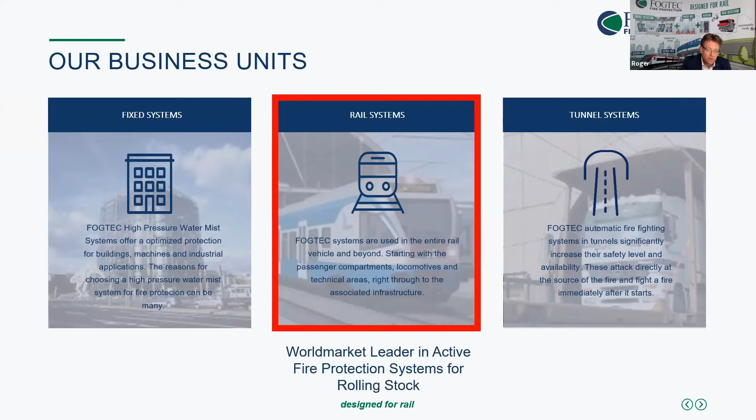The 3 main business units FOGTEC is working in are the so-called fixed systems, which are covering industrial applications as well as building applications. The tunnel systems, which take care of underground facilities, underground infrastructure. And the part we are also speaking about today, the rail systems department, which is taking care of all the rolling stock, the track guided vehicles, where, as I already said, FOGTEC is world market leader in active fire protection systems for rolling stock.

What does it mean when FOGTEC is working in this field? The rail systems team is a system provider for active fire protection systems in rolling stock applications, meaning it's not working on transferring building or aircraft business solutions to the railway. It's developed on the spot for rolling stock applications.

It's a system integrator with a full verification program, with a wide product portfolio on different levels of technology and safety. And it's a full-time rolling stock team, which delivered more than 17,500 systems to the market. And if I speak about systems, I mean systems covering a whole train and not counting each car. So it's really covering trains and locomotives in this way.

And the big difference to other fire protection companies especially is that this team is really taking care 24/7 of trains, locomotives, track guided vehicles, and not one day a hotel, one day an archive, and one day a train.

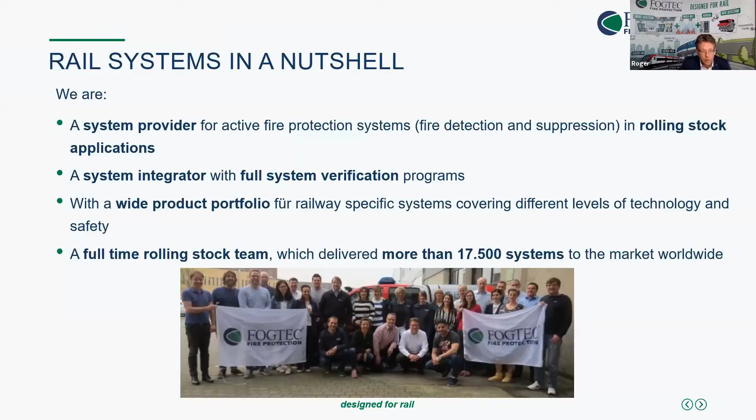The technology FOGTEC is using is more and more based on own developments related to the railway industry, especially optimized for this field of application, having fire detection solutions on different technical levels, depending on the requirements from the customer, water mist, gas extinguishing and aerosol extinguishing systems, and on the detection side, working with smoke, temperature, linear heat detectors, aspiration systems, the whole field of different kinds of products.

Where we are coming from, and this is what the name is related to, FOGTEC is showing the water mist technology. And FOGTEC started in 1997, its first applications in different kinds of fields, mainly building, but we also supplied the first fire protection system for trains to the Indian Railway in 1997, in the year we were founded.

Water mist technology means at the end to split water in very, very small droplets to create a big reaction surface. And the reaction surface you can create, for example, from 1 liter of water is giving also an impression, a parameter, of how efficiently and how fast heat and energy could be transferred. Meaning the bigger the surface is, the faster energy can be transferred.

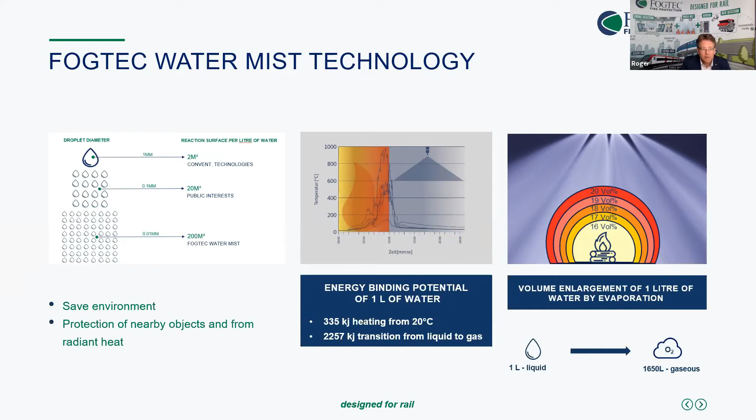At the end, directly at the flames, where we have the change of water droplets to water steam, there's also an effect to substitute the oxygen from this place by the water steam. From 1 liter of water in liquid phase, you could create 1,650 liters of water steam, which means also a displacement of the oxygen, but only directly at the flames where the big energy can be transferred. And in the rest of the room, the oxygen concentration is on the level you need for human protection.

So how does it look like then in a train, such technology? You see here a cross-section of the high-speed train, which is a graphic with our system and components around, to give an idea how the system should work. You have smoke detectors in the ceiling. How these smoke detectors are placed, or in which way it's validated where to place them, you will see later.

They are connected with the central unit, which is, as you can see here from the components, not a classical fire protection central. It's really a computer unit designed for rolling stock applications. If a fire starts, the fire is detected by the so-called two-detector dependency, and we developed an algorithm called dynamic two-detector dependency to avoid any unwanted activations on the train.

So a specific environment has to be created that the system accepts as an alarm, to avoid any influence on the system and its operation by smokers or more simple events. Because as you know from the railway, as early as possible the fire should be detected here, to avoid any interruption of operation.

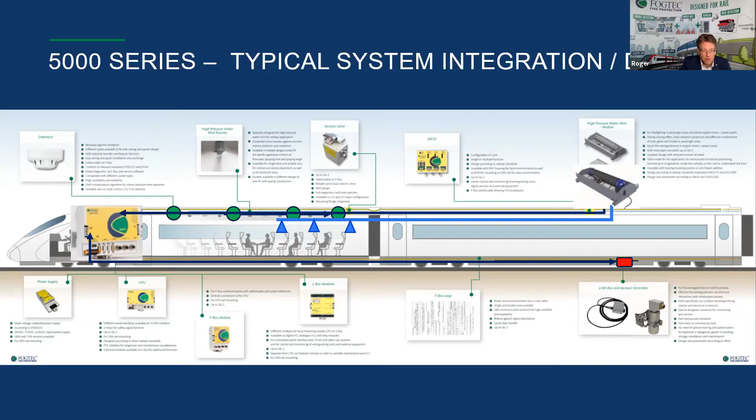In the underfloor area and the technical areas, in this example, aerosol generators are used, where a fire is detected by linear heat detectors inside, communicating with the CPU, the central unit, and then activating the aerosol generator unit to extinguish the fire.

And just to give an example of how it looks in reality to have a water mist system integrated: first, we have a passenger coach, a metro car in Germany, where a water mist system is integrated. And what you could see here is how two nozzles were activated within this passenger area. And we see this great energy transfer, which I explained before.

It's possible to reduce the amount of water needed for the fire protection, here to 2 liters per minute per nozzle. That means in total on this metro train we are carrying 60 liters of water to protect the train, with 10 minutes spraying time and 3 to 4 nozzles activated, depending on the zone where the fire is detected.

What you also could see is how the room was filling quite fast with a fine water mist. You still can see, to be evacuated in the right way, and the fire will be covered, securing the area. And this is also a point which is very important for the approval process: that the people on board can stay in the surroundings of the fire, at a distance of 2 meters, without any danger or any problem to their health.

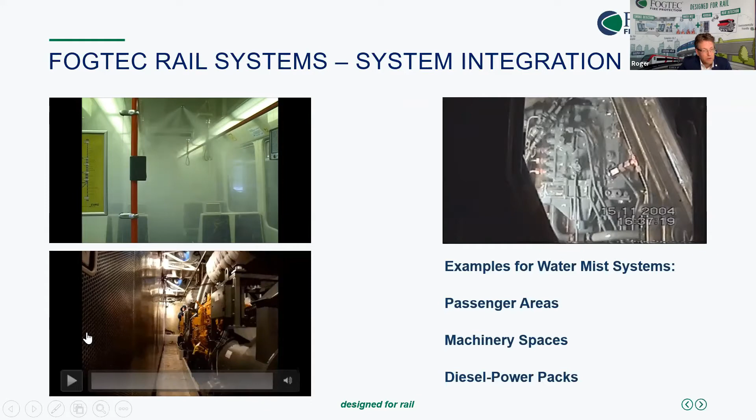And you will see with the next video, which in this case is taken from the type test we did on the Israel State Railway generator wagons with Bombardier a few years ago, that the design of the water mist is also very much dependent on the application.

In the passenger area, there will be a risk like vandalism, a burning bag, a burning newspaper, but in general a quite slow fire development, while in the machinery spaces we have oil, diesel, and maybe other stuff which burns quite fast with high temperatures. So a very fast increasing heat release. For this reason, the density of water mist is a completely different one.

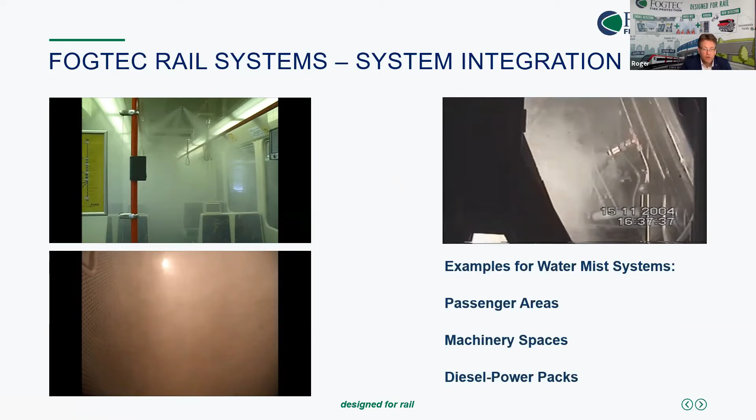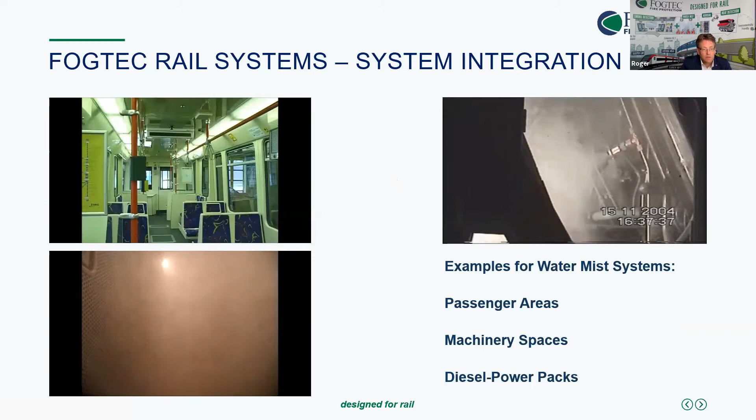To give another example, in a diesel multiple unit, this is a video, as you can see, from 2004 already. So it shows also a little bit how long we've been doing this business. This was during driving at 120 kilometers per hour, where we put a glass into the maintenance access and made this movie during driving to show how this area is filled, even if the wind is coming in from the front side. This is just to give an idea how this would look.

Then what I think is very important, to be always up to date, is the activity in associations, normative groups, and standard committees. So this is an overview of the associations and organizations FOGTEC is active in. The railway industry, as I already mentioned, European-wise, German-based, but also the International Monorail Association. Additionally, we have the CEN committees, the standardization committees on European level, American level, and Italian especially. Why Italy? You will see later on.

And then there are also big research projects like Sovereign and SOLIT. Sovereign is taking care of new energy carriers, risks from battery and hydrogen, while SOLIT is related to tunnel protection.

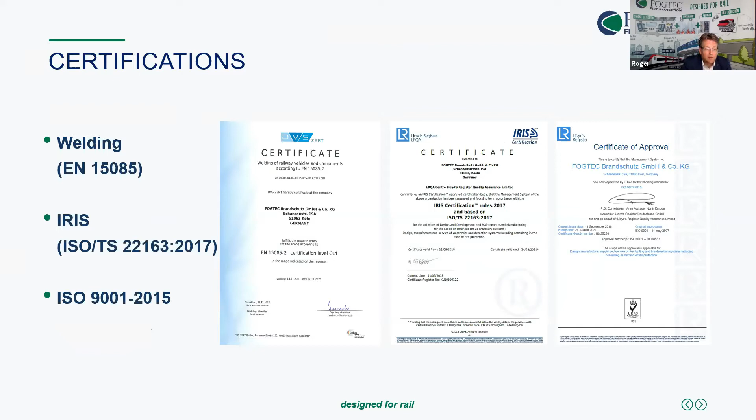Of course, there's a lot of paperwork, and paperwork will be also a topic later on. But paperwork also on certifications. FOGTEC is a certified welding company for components on rolling stock, is IRIS certified since 2009 and also ISO certified already since 2001.

Some of our OEM customers we are supplying to: our biggest customers last year were Stadler, Bombardier, and Siemens as the 3 big ones. But we also see that the Eastern companies like Hitachi and CRRC are coming more and more and taking also a big role for FOGTEC actually.

Some references I will just jump over on high-speed trains and intercity cars, special urban traffic references like monorails, light rail trams, light rail vehicles, metro cars, locomotives and special equipment trains for maintenance, and also cog railways. FOGTEC protected the steepest, the longest, as well as the highest based cog railway in the world.

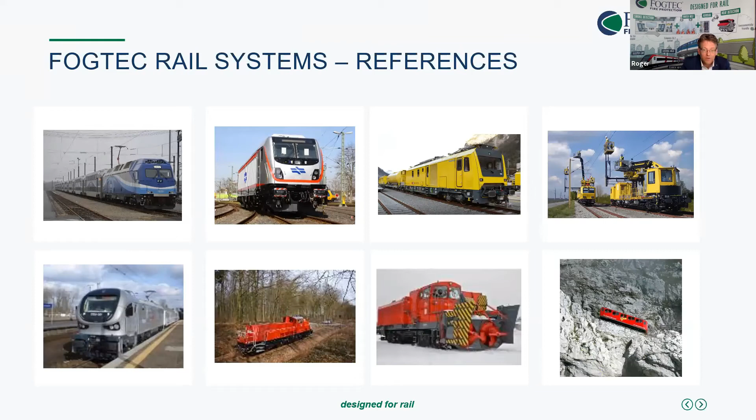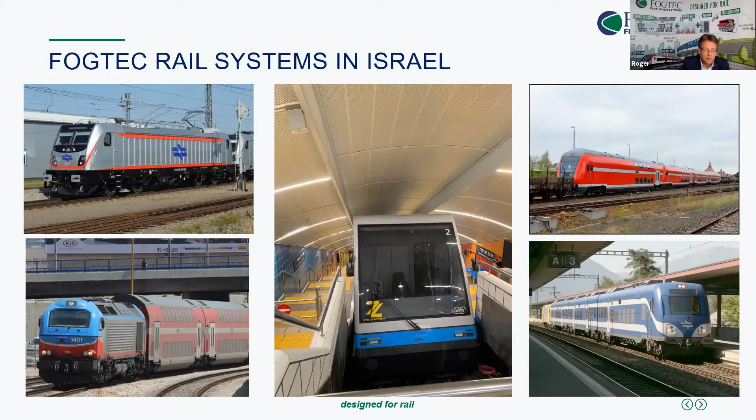But what is happening around? There are the standards we have in the background, and you will get just a short question to give your feedback, because when we talk about fire protection standards, I would say mainly two main standards are dominating the world more and more: the EN 45545 and the NFPA 130. So if I'm right, you have always up to 20 seconds to answer some questions in between, which will also come later on for some other slides. And then later on, we will see how the results are.

So I was expecting in this way for the Israel region that NFPA maybe is more dominating than the EN 45545. But that means also that one point of my presentation, a few slides later, will be very important for both of you. So we will see this further.

First of all, having a short look at EN 45545. The working group taking care of it is working group 01 from TC, Technical Committee 256. I would like to give a very brief overview about the status of part 2, the revision work which is running right now, and then some special topics related to the ISO as well as to TSI.

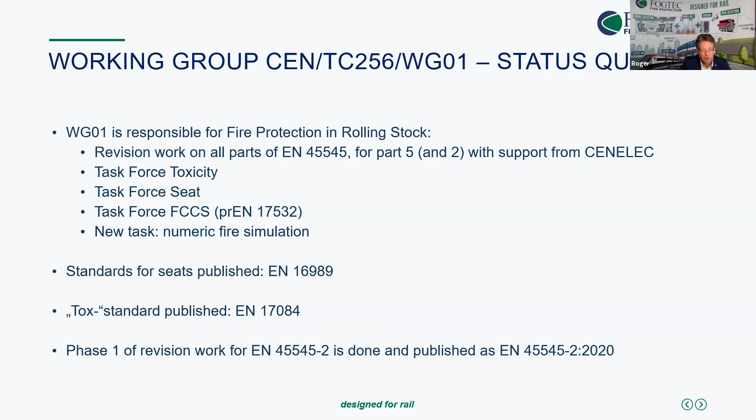There are 3 task forces working, one for toxicity, one for seats, and one for FCCS, which means fire containment and control system, where a new number is already released, actually as a pre-EN 17532. And a new task is coming up for numeric fire simulations, where CEN has the idea also to give more standards to that. For the seats, the standard is already published, 16989. The toxicity standard is also published under the number 17084. And for EN 45545 part 2, phase 1 of the work is already done and already published as EN 45545-2:2020.

But how to work with that? Because the TSI, the technical specification for interoperability, is not a topic for Israel, I have to agree. But in Europe, it's creating trouble now because this TSI is referring to the older standard. And this brings some strange situations to the European markets, in that non-TSI vehicles, meaning vehicles not running on a TSI European network, can already use the new one or the old one, they can choose, while for the European network, which is referring to TSI, they still have to use the old one.

So at the end, actually, people have to discuss and clarify the applicability with the contractual partners and the approval body, the authority. And so actually we speak about a transition period as long as the older version can still be used. But this is a really big topic, that the TSI standards are not automatically referring to the latest version of a standard.

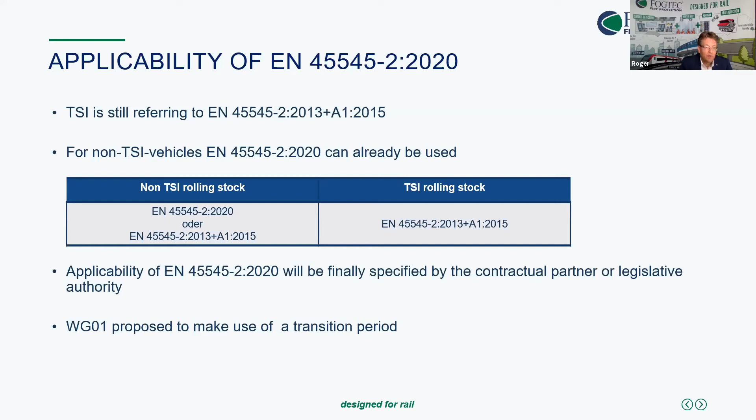The revision work on the EN is normally checked every 5 years. So 5 years after release, there's a survey to check if there is a need for revision work, meaning validation against experience and further needs. And if there is a view from people that a revision should be done, then there should be consensus among all to get it started.

And this is already done for all parts of the actual version, meaning all 7 parts are under review and will be reviewed in the coming time, where I would expect something like 3 to 4 years from now for the final result in a completely new 45545. Actually, they are working on part 3 and 4. These are the two which are right now under review.

And for part 2, released in 2020, there's already an amendment in progress because there were still some failures in the references as well as in the foreword. So if you look to the latest standard of part 2, you have to refer to 2020 and the amendment.

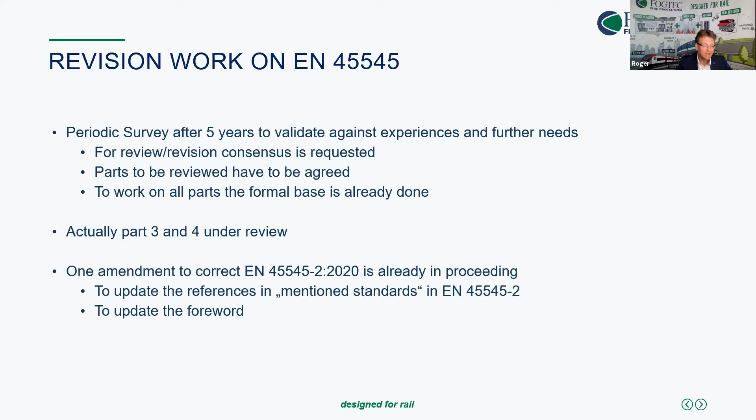The one big topic is then, and this is exactly the situation we could also see from the first question of the survey, that we are jumping around the world as a supplier, as a partner, as a planner, as a company, and we have to change standards from country to country or region to region. So there was a proposal now from Working Group 01 to the ISO committee to set up the fire protection standards in a worldwide standard, an ISO standard, and this should be based on the EN 45545.

This brought a lot of intensive and interesting discussions, but in the end, from all sides, very positive feedback. And so now the next steps are the application for the work items and to set up the working group at ISO. So I would expect that somewhere in the future, there would be one joint standard to cover fire protection in rolling stock and railway. But as you know, standardization work takes a long time. And so we will see when we can reach a final result on that.

And this is a very important topic, what you were giving here as a result, because this would also be feedback I would like to give to the ISO committee next week when we also have our meeting with the CEN committee. So the opinion of the people using the standards or having to make use of the standards is very important, I think, and this I will transfer to the committees.

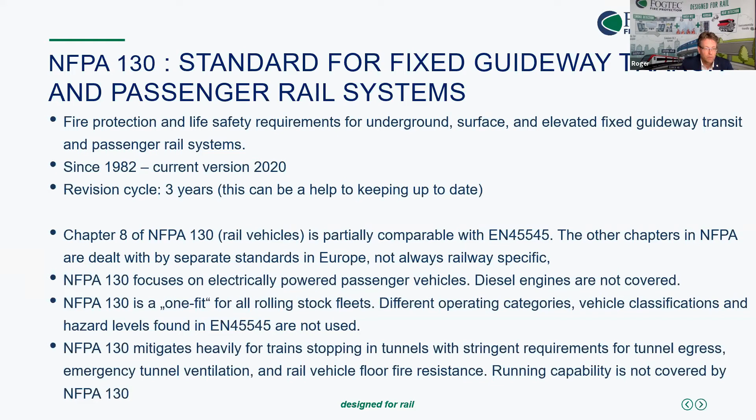It does not mean that I agree to all topics mentioned in it, but in general, the overall approach I fully agree to much more. And a little bit compared to EN 45545, we put here the different parts in relation.

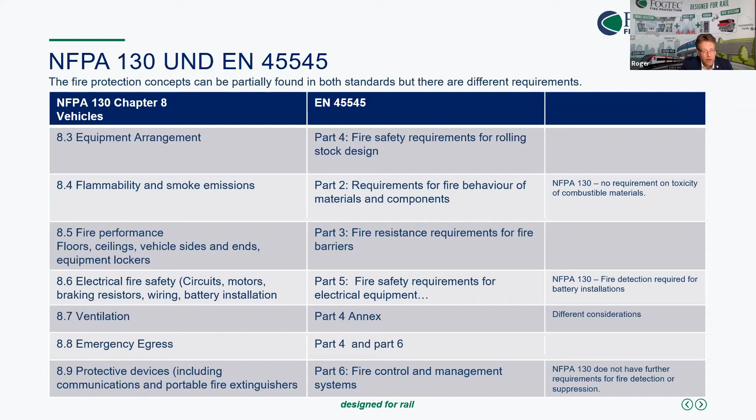So you can see that later on also. I will not go too deeply in that. But two main topics I would like to bring up about the actual discussions of NFPA 130, about the active fire protection. In the past, and even today, the NFPA 130 is not really taking care about active fire protection. And starting with 2014, there was for the first time an annex called Annex G involved, where compensation measures were given by using an automatic fire suppression system, mainly in the passenger area, to protect the people.

And where it was described that this can limit fire growth, and that this could also influence the design of stations, the design of ventilation systems, and so impacting the infrastructure in a positive way, if you see it from the volume to invest, and so to make it more efficient also cost-wise.

During the last discussions, another topic came up. Maybe you know that in the US, most cars are closed to each other, especially in the metro area. So maximum two married pair cars are used. And now in New York, I think for the first time a real open gangway philosophy is followed. And it's more like a test trial on 10 trains out of the big order they placed with Kawasaki.

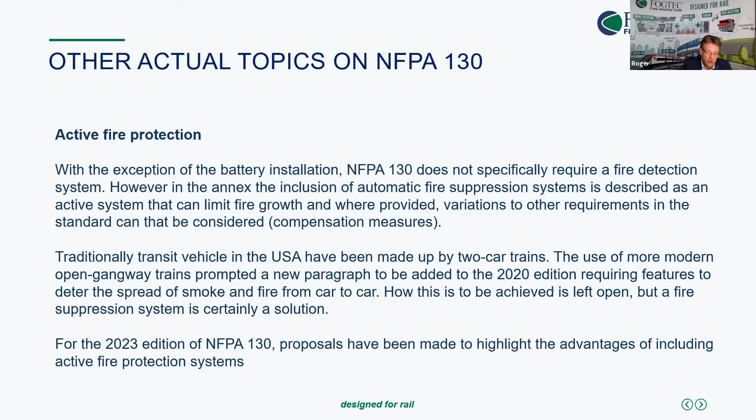And so now it's a big discussion how to avoid any spreading of smoke and fire from car to car. And of course, also for this, a fire suppression system could be a solution. And this is under discussion. And for the 2023 edition of NFPA 130, there for sure will be a bigger part on one side for firefighting, fire detection generally, but also for the open gangways, the open gangway philosophy.

A big challenge actually is the component listing concept, because you have these components which we also tested in different ways between NFPA and EN 45545. There will be also development for the next revision. And for this, of course, a joint ISO standard could be a very, very good solution to make this more efficient. But at the end, it means also everybody has to agree to the standard. And this makes it quite complicated to find a joint solution.

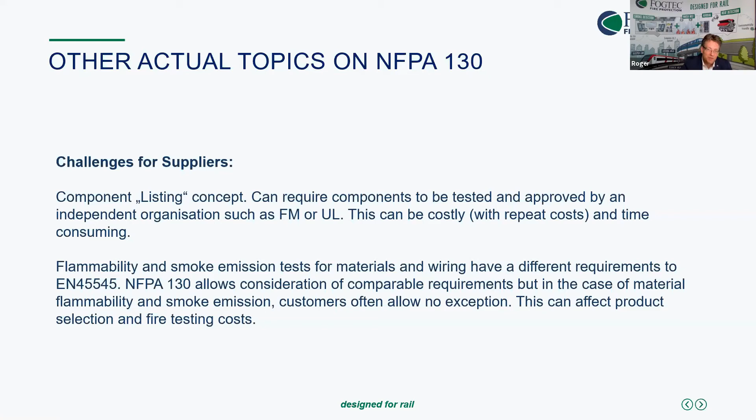There are two other standards I would like to mention quickly. In Italy, after the big tunnel fires, there came out a law that all trains which run through a tunnel longer than 1 kilometer have to be protected. Means all trains have to be equipped in the passenger area with a water mist system. And this is legally requested in Italy. I found it quite strange. Of course, for our business it was a very good development, but I think Italy is still the only country worldwide requesting that.

But this was a reaction to the big tunnel fires and a lot of dead people, which the Italians had to claim after, I think it was 1999 to 2001, where we had a row of several tunnel fires. And so this law, this Decreto Ministeriale, came up where this is requested. And the UNI, the Italian Standardization Committee, had to develop a standard in accordance to that, how to implement it in a train and how to test such systems.

So it could be seen in different ways. On the one side, it's an optimum to protect passengers. On the other side, it's questionable if it's really necessary to always have all systems on board and to protect with all potentials. And I see from the answers, I'm with you that it should be project-specific decisions, but in Italy, it's still clearly claimed by law to have such trains protected.

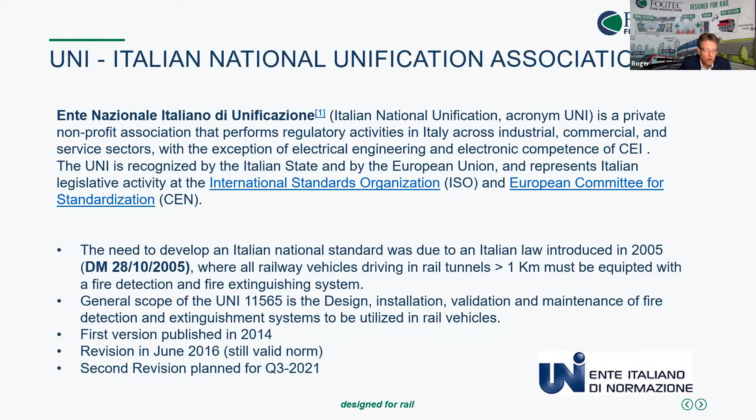The first version was published in 2014. The actual standard is valid from 2016, and in Q3 of 2021, the next revision is planned. So the guys are just working on that. Also, our Italian colleague of FOGTEC is working within this working group. This is not so important at the moment. This is a bit of comparison to the other norms, but you will see this later on if you go through, and you can also contact us any time if you want more information about the way of proceeding.

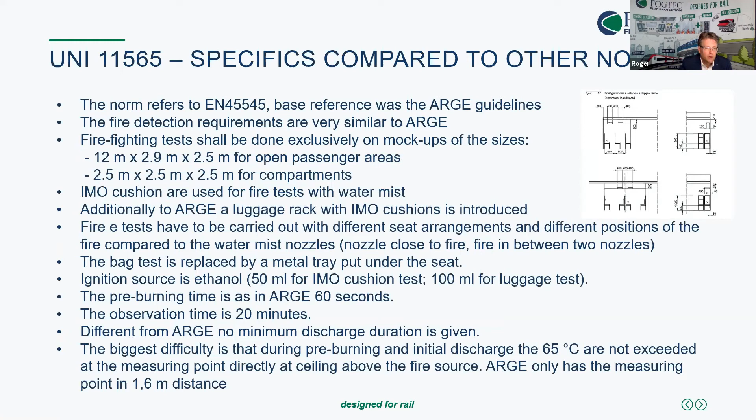I just want to jump to the ARGE guideline. This is a standard first published in 2007. The working group on that started in 2002, organized by the 3 TÜV organizations in Germany. And the point was that there are standards requesting a fire detection and firefighting system, but nowhere was described how to validate and verify them, and how to check if the systems are working right.

And so these 3 parts came up: part 1, fire detection, part 2, firefighting, part 3 for system functionality, and also some safety topics. And actually version 5 from 2018 is valid. Here we have a 2 to 3 year revision cycle to keep it always up to date, with all the things learned every year from checking, verifying, and testing.

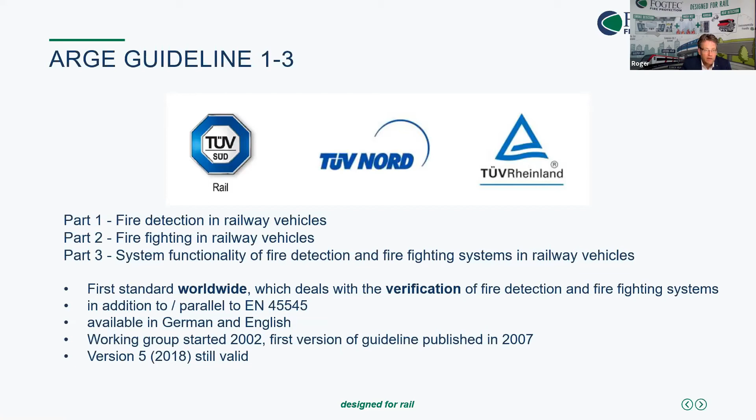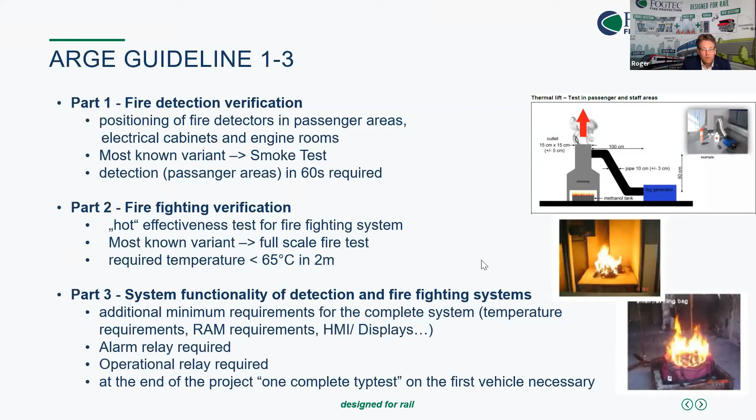As I said, we have 3 parts, and it's also described in a good way how to test them with the smoke generator, and how to make the fire test, how to have standardized fire tests to check the effectiveness of such systems and the performance.

And if we speak about topics like that, of course we also have to speak about safety. Safety here, I mean functional safety. And within our company, we set up a few years ago a specific team only taking care about that.

So if we speak about safety, which comes mostly with the customer's requirements first, but their requirement should come from a risk analysis. And what we detected also, to be very honest, is that it is preferred maybe to be safe, to be sure, not to make mistakes.

So people request a higher safety class than they really need. From the risk analysis point of view, to monitor what is the risk on site, the risk of the operation, how to evacuate people, we could see in a lot of cases that people unnecessarily increase the safety level, which could be rated between 0 and 4.

So in this way, it's always our recommendation to really check what you need, and then define the safety levels which are requested.

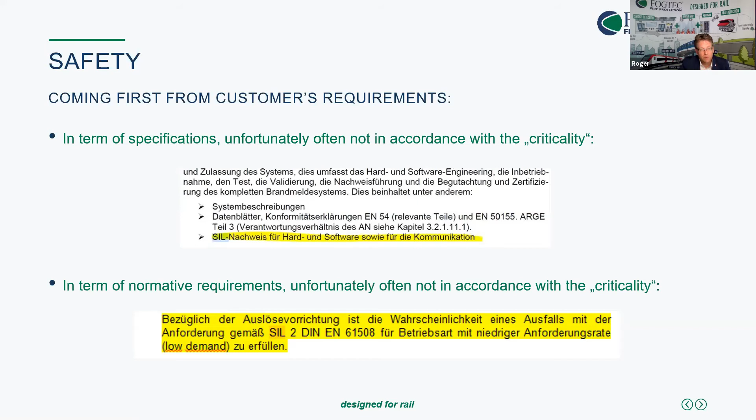Still people want to increase the number to be sure, which creates a lot of efforts and costs that are not necessary. So from this way, it's really a topic where we have to educate people much more, in a lot of cases.

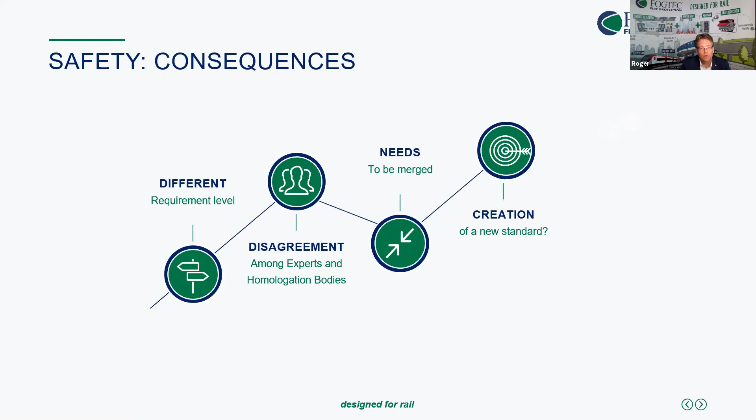And for this reason, in a project you always have the situation at the beginning where the requirement level comes from the analysis, then you have a discussion with the experts, and then it goes forth and back a little bit to find at the end a solution, what is the right way to proceed.

And FOGTEC has a specific approach, as I said. We set up a team for that now 5 years ago, which is taking care about safety and SIL requirements in a very detailed way.

Our approach is to have a fully certified SIL2 hardware and software solution available for the market for the customers, because there is no half SIL, there is no half safety—there's safety or non-safety.

And for this reason, it's really important also to understand that systems which should be SIL certified have to be SIL certified with all the requirements around.

What you can see here is that we started for the current series of our products in 2012, what is today called the BI level version, meaning basic integrity level version. And this starts from the lowest requirement level of safety.

And then we increase the system, the single components, further and further to the higher levels until a fully certified SIL2 system, both on the hardware components as well as on the software base. This is a modular solution, highly flexible, with full redundancy in communication.

This is really important for me to mention, because a lot of people speak outside about SIL and safety, but if we speak about safety, it's really important for all the components to be approved against EN 50155, EN 50126 and 8.

The software assessment has to be done in regard to EN 50657, and the complete system assessment—this is at the end what brings you the SIL and safety certification—is the EN 50129.

And we see a lot of people running around talking about SIL and safety and providing part solutions with some smaller things, maybe a safe relay or something like that. And this is not the way safety has to be understood.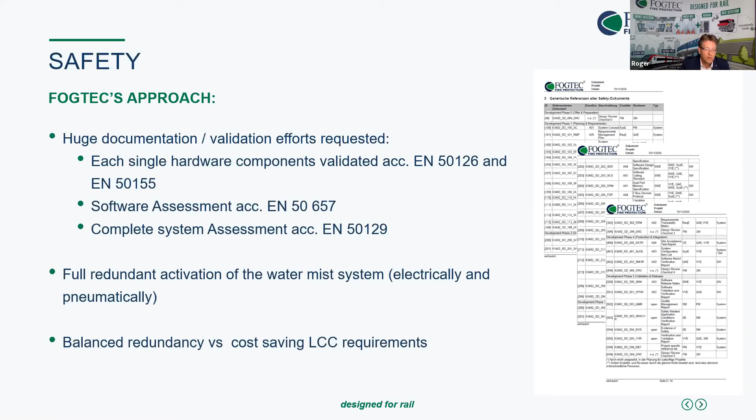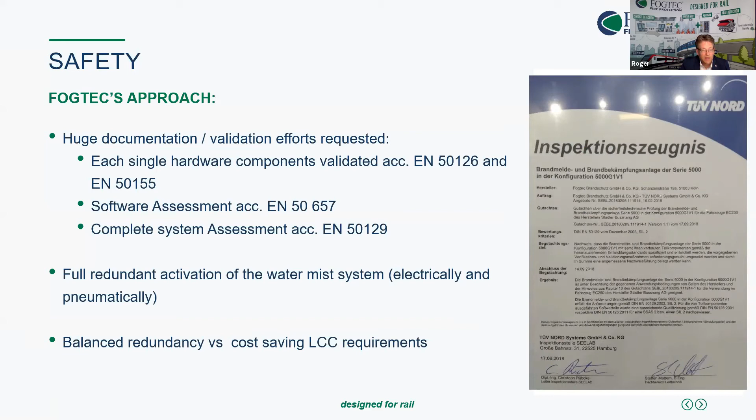Safety also means we already mentioned EN 50657, which is the software standard right now for how to program and handle software. This has a huge influence on the organization of the company, its structure, and how development processes have to run.

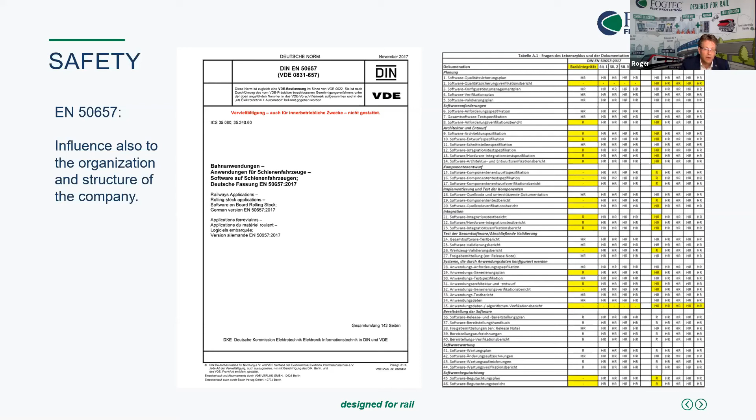On the right, you see a table of documents which have to be created for software development only to demonstrate that you did it the right way and checked every step of how it was proceeded. So at the end, a lot of paperwork again.

For this reason, we have to ask ourselves: does more paperwork really help make systems safer? Please, in any project, ask yourself seriously what do you need. It's not necessary to increase safety standards only to feel better. There should be a specific reason from the risk analysis behind why you need a safer system. But if you decide for it, please do it the right way and not with partial solutions.

Doing it the right way, smart concepts is a very good example, because with this solution we could demonstrate with operators together how to optimize and create an underground infrastructure and mobility system much more efficient.

The basic situation with this case study was that we had an older metro car in the city of Essen in Germany, and they had a lot of problems because the approval body requested them to rework all underground stations as they had an issue with the evacuation concepts. This meant they had to demonstrate how the underground station is affected if a train is burning at the platform, standing at the platform.

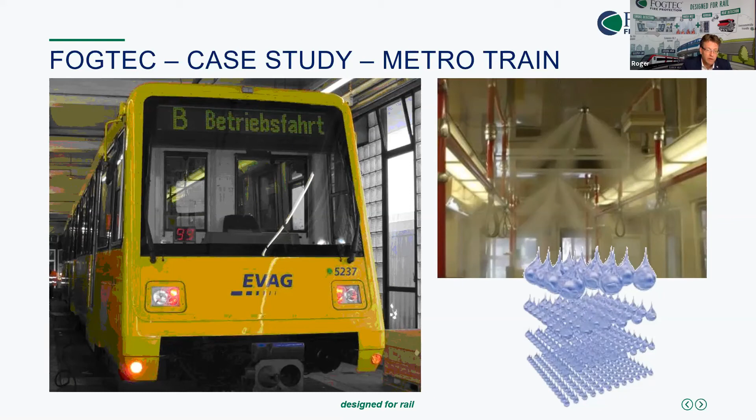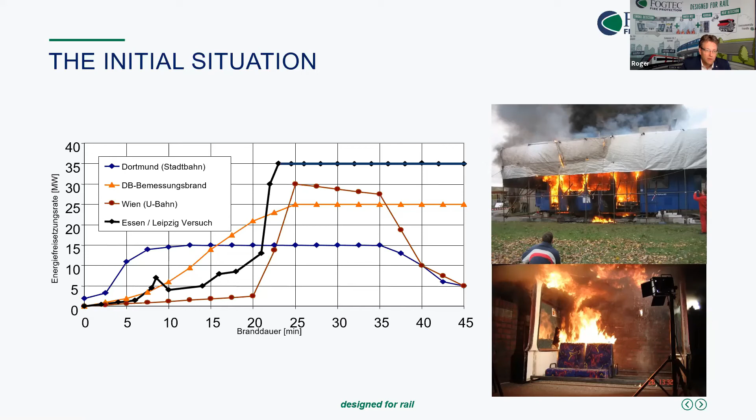Then they created out of that the black curve here, the Essen-Leipzig Versuch, as it's mentioned, where we had a development up to 35 megawatts for the train, which of course could not be handled by the old stations they had.

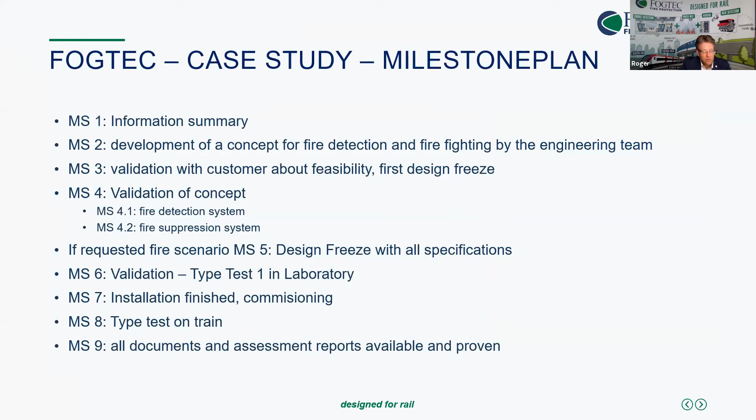Then, in connection with that, we did a milestone plan for how to optimize the fire scenario. With the different milestones, which we also agreed with the approval body, we started to validate different solutions for this kind of train, implementing a fire detection system and doing smoke tests on board to validate a solution for how such a train could be protected.

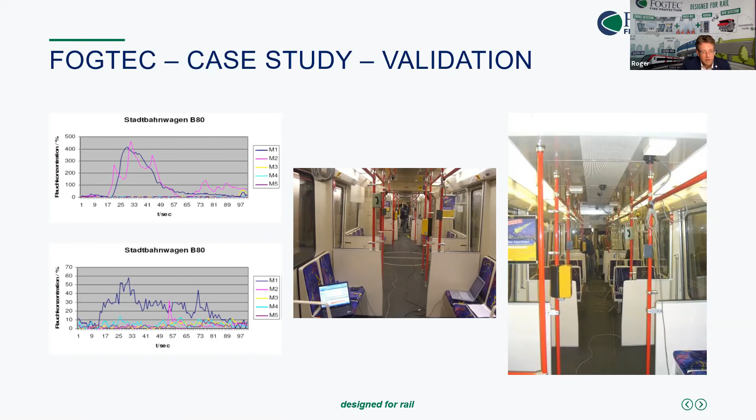Afterwards, a full-scale fire test with original material was done, with four different test scenarios using a water mist system, and then one hot test as a verification and comparison to the activating test.

I made a big mistake during this test, to be honest. We were monitoring the fire test and took a lot of pictures, but we should have made a picture or movie of the customer's face when we did the hot test and he saw how well his material was burning.

This material was approved against DIN 5510 from older times. But after some years of use, with people sitting on it and cleaning materials applied to the seats, it doesn't behave the same as at the beginning. You could create quite a nice fire on that.

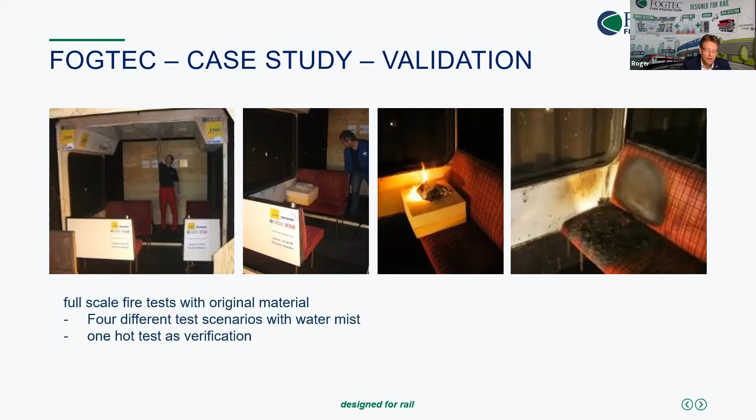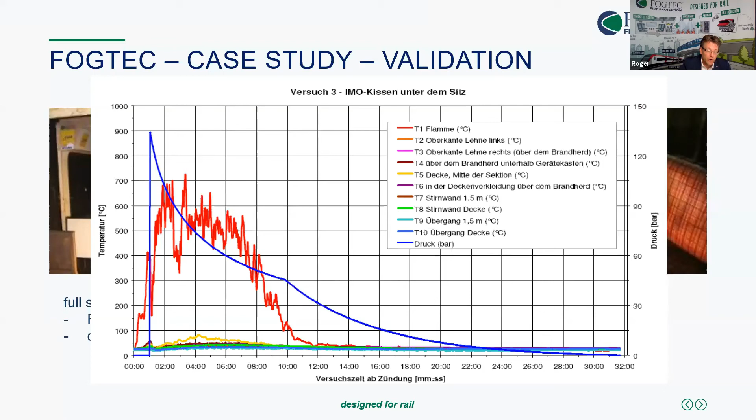With the fire protection system on board, we could demonstrate that the fire curve was suppressed immediately. On this curve, the x-axis is time and the y-axis is temperature. Besides the direct flame temperature, shown by the red line, temperatures are not increasing much, only a few centimeters above the ignition source. The yellow line came up a little, but the fire was suppressed. The flames fought against the water mist, but the fire did not spread and was controlled very well.

Based on that, the system was designed and integrated into the train, where you can see here. We also did further calculations on the car body for how to integrate the cylinders and systems. In the end, a 60-liter water cylinder had to be integrated into the train, along with smoke detectors in the ceiling, nozzles, pipe work, and everything around it.

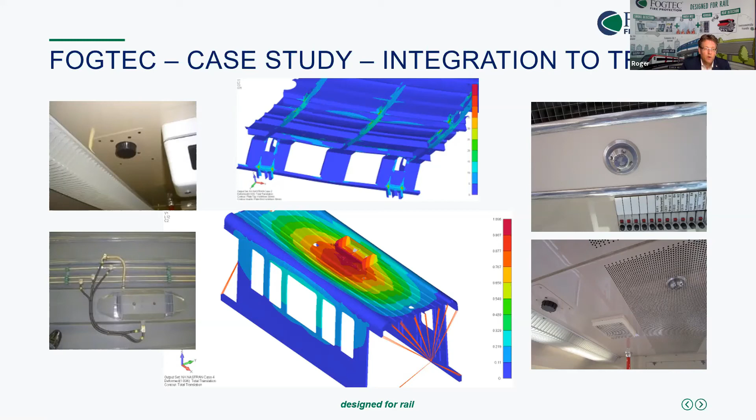Then the final step was the type test with the approval body. You see on the right pictures from the type test activating while people are standing inside.

On the left side, you will see me explaining to the experts how it works. You can see I was much younger during this time, and hair was a lot longer back then—unlike now, when all the hair cutters are actually closed in Germany.

But most importantly, looking at the fire safety scenario curve again, there was a new line now, the green one. That's the one which the approval body agreed the operator can use if a FOGTEC system is on board. So from the black line they had at the beginning in Essen, they could change to the green one when using a FOGTEC system in the trains.

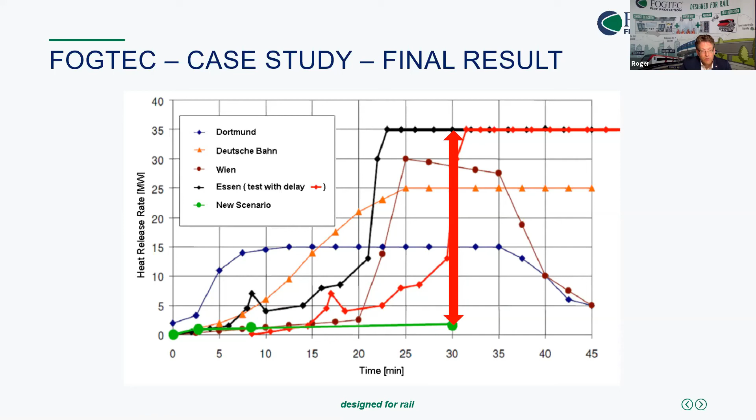Depending on the equipment of the train, they could also raise two different scenarios for the modernization work and investment in the underground stations. Comparing the black and green lines, there was a difference in the investment for the stations, including equipping the train, of 89% for the green line. This is where I'd say the smarter way of firefighting also creates a very commercially interesting case for each operator.

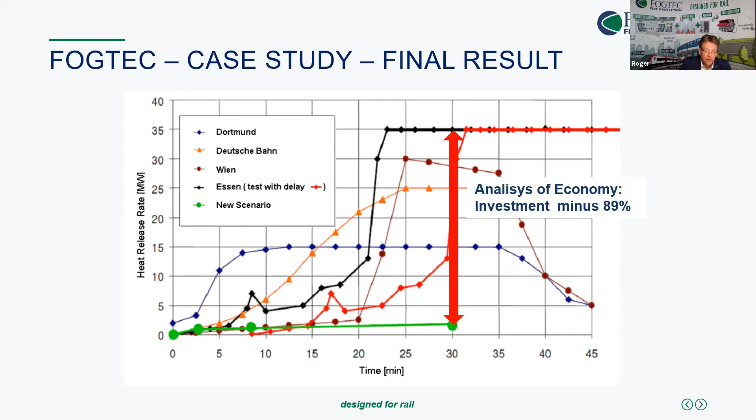So there's a very close relationship now, because we became something like a hero for them, as we could help them create this scenario and realize such a lower amount of investment needed to upgrade the stations.

Last point of my presentation: I'd like to jump to new energy carriers, which bring new challenges to fire protection topics. As we've said, more and more regions and countries want to become greener. But along the life cycle of batteries and hydrogen solutions, it's quite unclear—there's still a big gap in knowledge for fire protection.

We have a very high density of energy bound in a very small volume, and getting this under control is a big topic for all of us in society together.

For this reason, there's one research project I'd like to recommend to everyone involved in new energy carrier topics. It's about the safety of urban underground structures due to the use of new energy carriers.

This means figuring out how to handle a parking house or tunnel if a car is burning there, and you may not even know if it's a battery-driven car—meaning the fire is very local—or a fuel car where the fuel may run out and spread on the floor, or a hydrogen car where the hydrogen is under the ceiling and starts to burn. All these cases and scenarios are not finally resolved.

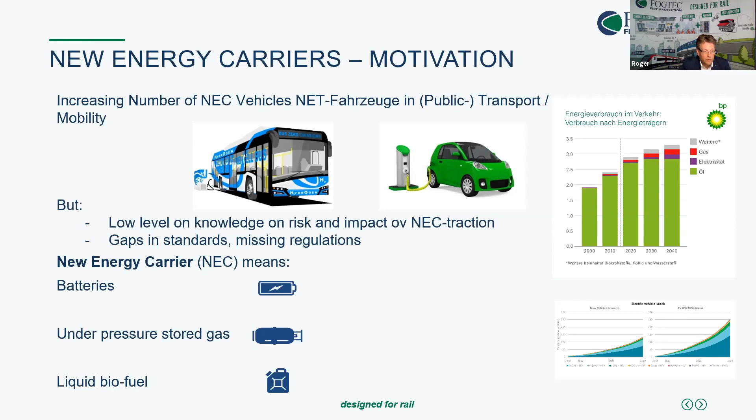Do not get me wrong, I don't want to make you afraid about these technologies. It's just from my point of view that they have to be handled right, and that we have to know about the risks and how to manage them. But to create this knowledge, how to handle them, from the new risks and the missing knowledge, we have to combine it in a research.

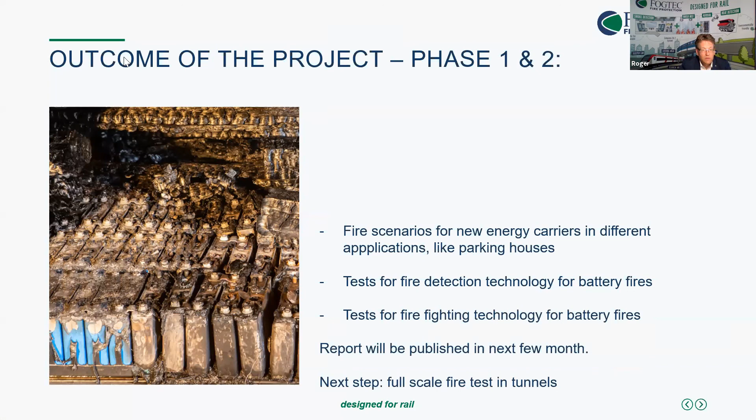And also from the fire tests here, we could see as a result that for the fire scenarios for new energy carriers, new scenarios could be set up. There's a new standard now coming out also from this project for parking houses, how to design them if e-cars are in, if hydrogen cars are in. There were a lot of tests done for fire detection technologies for battery fires, and which way to detect in the right way and the fastest way, how to fight them.

And maybe you already know that you cannot really extinguish a battery fire, even if companies unfortunately are telling you that. But if a thermal runaway is starting in a battery, you will not be able to extinguish the fire. You only can try to cool down the area around and to reduce the spreading of the thermal runaway.

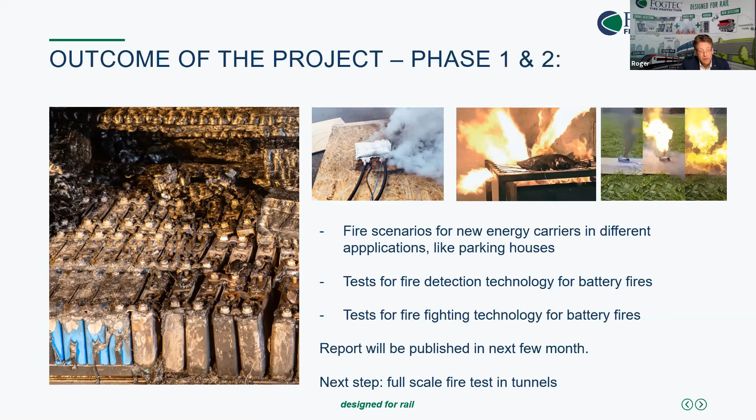So this is a very big topic, and the official report will be published in the next few months. And now the next step is starting the full-scale fire tests in tunnels, which will be quite exciting for all of us to see what will happen there. Just to give a brief overview about that also.